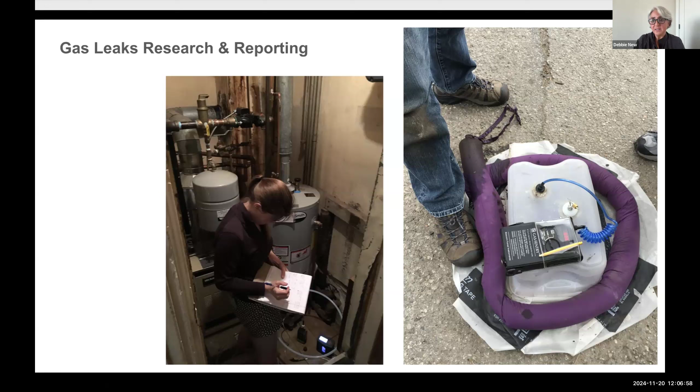Many of us were also concerned about climate impacts from all of this leaking methane. So in addition to focusing on the problem, we tried to find solutions. One of those solutions that we were advocating for was first described as 'pruning the tree,' which I love.

It came from a tree physiologist at Boston University who helped us imagine that the gas system is a lot like a tree underground, going out from a central point and distributing the gas through the trunks, the boughs, and the twigs on the end. And he said, why don't we start at the end, at those twigs, and start replacing the gas system with other solutions.

Gradually pruning it back until we don't have gas in our communities anymore. So instead of having gas in pipes, what we advocated for was water in pipes, to take geothermal and ground source heat pump solutions and network them. It's not an original idea, but to do that where the gas system was really leaky, instead of replacing gas pipes, replacing with networked geothermal pipe systems.

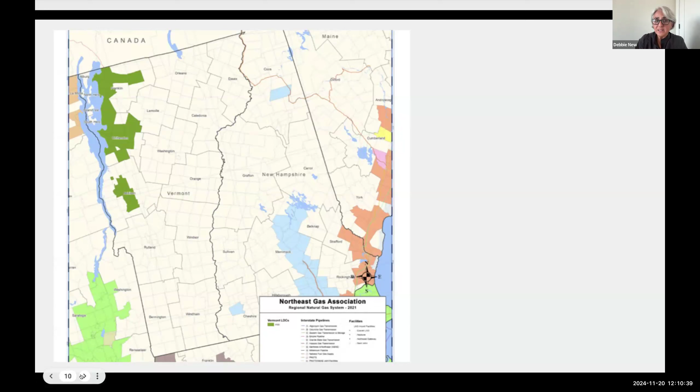Before I go on, I want to make sure the landscape of fossil fuels in Vermont is clear. On this map from the Northeast Gas Association, the gray parts and the green parts are where we have gas in Vermont: 55,000 customers in 3 counties, although it doesn't cover all of even those 3 counties. The rest of the state has a good bit of wood heating, but it's mostly oil and propane. That leads to significant energy burdens because Vermonters are paying high prices to keep their propane and oil tanks full, and who knows what's going to happen with those prices. Many people are choosing either to buy food or medicine or to heat their homes.

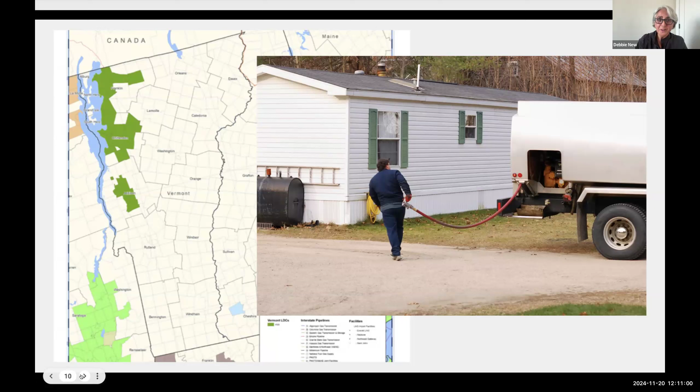Vermont Community Thermal Network started out of this issue, because Vermont was trying to figure out how to get people off of fossil fuels, in particular off of oil and propane, which is unregulated in Vermont. So when I arrived back in Vermont from my work in Massachusetts, people here were debating quite intensely what we could do instead, and it seemed to be a choice between biofuels and people didn't know what. So we needed other solutions. It was clear we hadn't arrived yet at something everybody could agree on that was going to work. We needed something that people could say yes to, essentially.

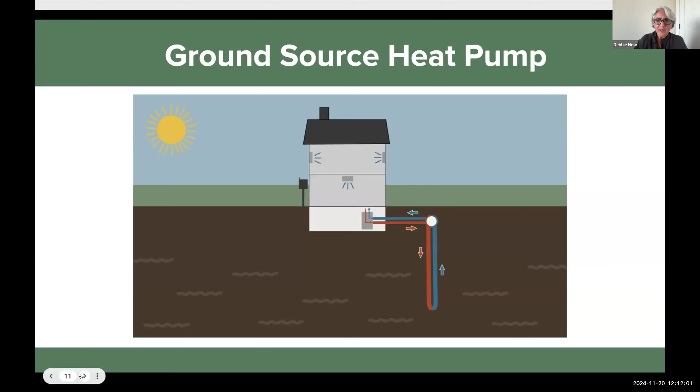So I asked, well, what about geothermal and ground source heat pump systems? And people said, well, we tried that about 20 years ago and it didn't work very well. So I asked, well, what about networked geothermal, knowing about what was going on in Massachusetts and other places with this kind of system? And the response that I mostly got was, what's that?

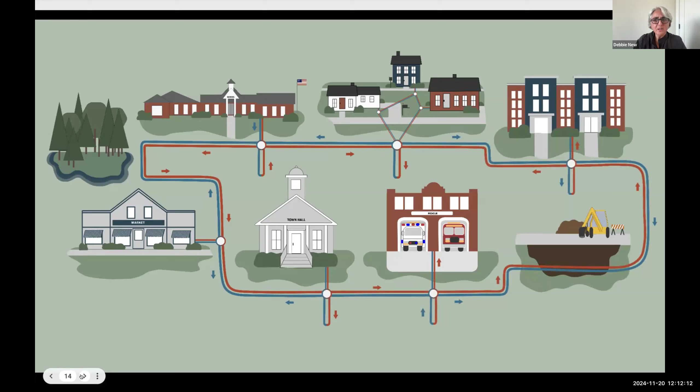So I started working on trying to put this solution on the table. And it wasn't just about networked geothermal, because I learned about thermal energy networks and the value of waste heat. We have a lot of heat that we already are creating and that is just going down the drain or out of our ventilation systems.

One of those big sources is wastewater. Think about the water that you use, that a business would use — a laundromat, a car wash, a hospital, a hotel — much of that water we heat up and then flush down the drain. That's heat that's been produced and paid for. Well, we can harvest that heat. We can access it at the building, at the sewer line, or at the wastewater treatment plant, where there's a lot of heat. That heat can be recaptured and repurposed and shared among buildings.

The other source of waste heat that's really important is waste heat from ventilation systems, and that often comes from refrigeration, because to cool things down, like in your refrigerator, we need to reject heat. That's like how a heat pump works. So imagine a big heat pump, a big refrigeration system like a supermarket or an ice arena or other large buildings where the cooling needs to happen. There's a lot of heat leaving those buildings that we can capture and repurpose as well.

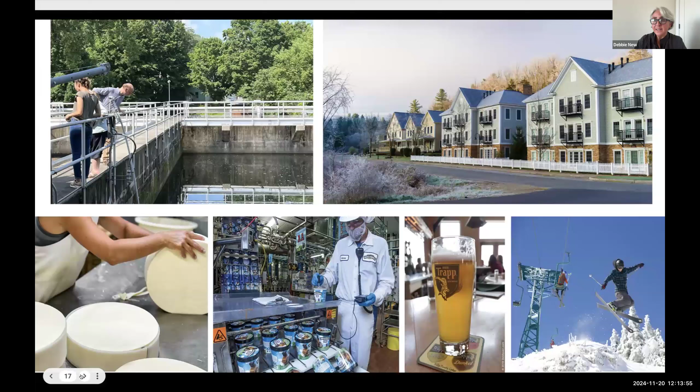And it turns out that waste heat is a thing here in Vermont. Although you might think we don't have big buildings and a lot of waste here, many communities are putting in or needing to expand, upgrade, or fix their water and wastewater systems. You can see people in the upper left-hand corner visiting their local wastewater treatment plant to learn more about that. We also need to create more density in our communities — building new housing, making places more walkable, and revitalizing our downtowns. Those are all really important opportunities for creating a thermal energy network. I could talk more about that.

And it turns out that Vermont businesses are creating a lot of heat that's being wasted — whether it's cheese or a certain kind of ice cream, breweries, or even the ski industry. There's a lot of heat out there that we can reuse.

In particular, the ski industries are really interesting because here we need snowmaking ponds in order to make snow. That's a source of thermal energy right from those bodies of water that we can use. But also the compressors that make snow put off a lot of heat. So it turns out that thermal energy networks make a lot of sense here.

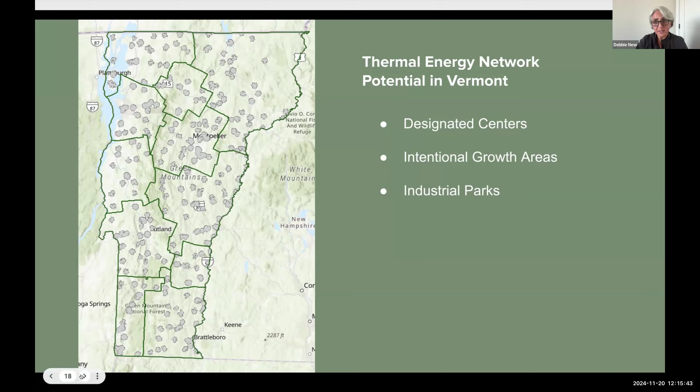So if we can offer clean heating and cooling in these places, we're going to be a lot better off economically. And that's a big factor that is motivating Vermonters to check this out.

So this brings us to Vermont Community Thermal Networks and what we do. We're a statewide organization, and what we do is tap into the expertise we already have here in Vermont and bring in needed expertise from out of state. We're engaging communities about this, and we're also coordinating with Vermont organizations and coalitions and national networks as well.

So the focus of our work here is community-driven thermal energy networks. This work is place-based because putting communities first in this process makes sense when we're already talking about local thermal resources. It's about meeting local goals and needs, as well as staying flexible and introducing thermal energy networks as something we can take multiple pathways to implement here.

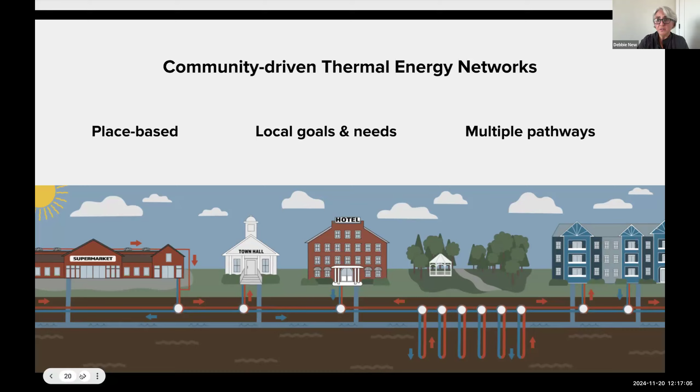In other states, it's mainly investor-owned utilities that you might be hearing about doing these projects, although that's not true across the spectrum, or it's private companies. Here in Vermont, we're not starting with laws that mandate utilities do these kinds of pilots, but we're starting with where heat is in our communities and finding out who's interested. So we're not relying on corporations to do this for us. In our outreach, education, and advocacy, we find that there are a lot of people interested, and we're not doing this by ourselves.

Here are some of our state and regional partners. In Vermont, we have an efficiency utility called Efficiency Vermont, town energy committees, regional planning commissions, and regional economic development corporations, all in on this. We have a bond bank, which is essentially a green bank for municipalities, and an economic development authority, which is essentially a green bank for businesses, as well as other networks and coalitions.

So the other part of our work, besides education and outreach, is about policy, because in Vermont, we needed authority in order to do this locally. Vermont is a Dillon's rule state, which means that whatever is in a town charter is what matters. Well, we didn't find many town charters that say explicitly you can go ahead and implement a thermal energy network and set it up as a local utility.

So we passed a law that just got passed at the end of May this year, and it's pretty simple. It's about 2 pages long, and there can be a link in the chat to a page on our website that tells more about it and has a link to the actual language if you'd like to see it. But essentially, this law allows any municipality in Vermont to implement a thermal energy network and establish it as a utility without Public Utility Commission or state approval and regulation, just like municipal water and sewer utilities operate under local control.

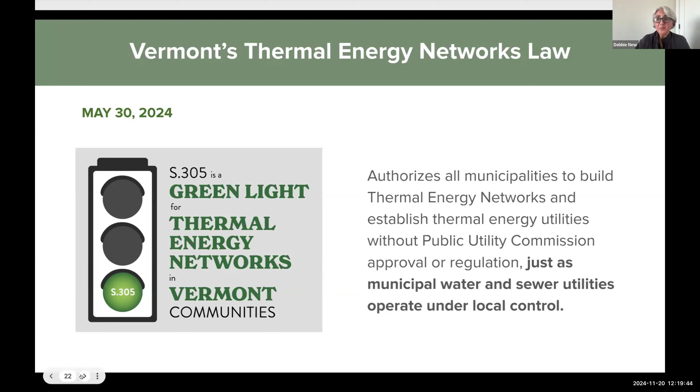So when we advocated for this law, we didn't find any opposition to it at all. In fact, people kind of shrugged and said, well, sure, makes sense. So now we have that green light.

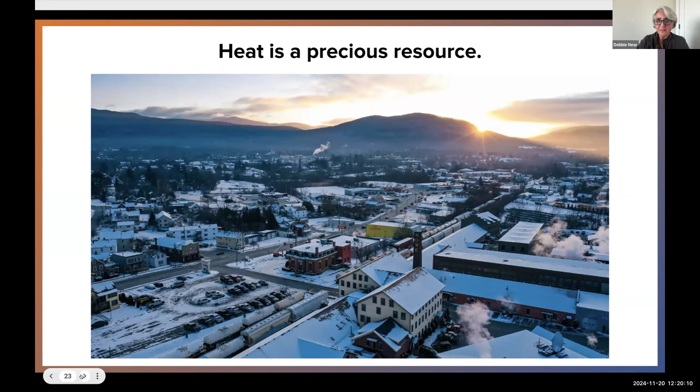So with that education and with the policy in place, I wanted to break it down a little bit for you and show you how we talk about this in Vermont. And where we start is that heat is a precious resource. Now, this is obvious to Vermonters who experience our winters, but it's an important place to start because we spend a lot of time and effort and money trying to make heat and move it to where it's needed and save as much of it as we possibly can.

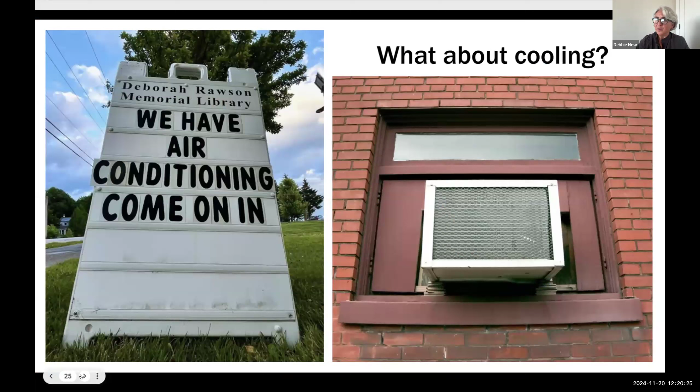And what about cooling? That's something that we're not very well set up for here, but we're going to need it more and more as our climate warms.

So we talk about thermal energy networks as something like this in a Vermont town. You can see here that we have multiple sources of thermal energy. The supermarket is contributing heat from the fans on top into the network from its refrigeration inside. There are multiple buildings where the wastewater is allowing heat to be recovered and put into the network. And you can see under the town green, there's a geothermal bore field, which is an important component of this for stability to supply that moderate constant temperature we can get from underground and provide reliability as well as storage for the system.

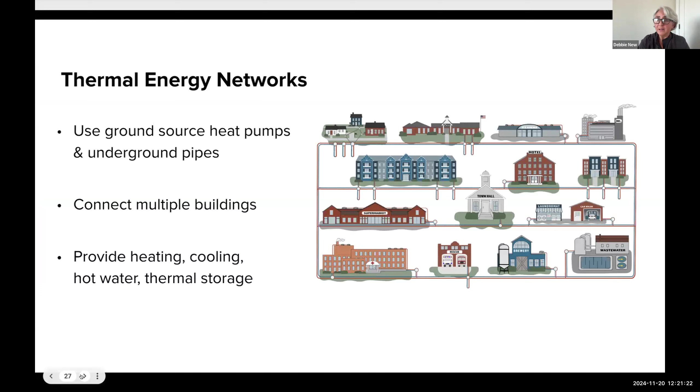So when we talk to people about this, we say thermal energy networks use ground source heat pumps and underground pipes to connect multiple buildings and provide heating, cooling, hot water, and importantly, thermal storage. And we emphasize that thermal energy networks use heat that already exists across a community, in many cases has already been paid for, and would otherwise be discarded, in fact, is most often being wasted. Importantly, we focus on the fact that this kind of heat can be used efficiently.

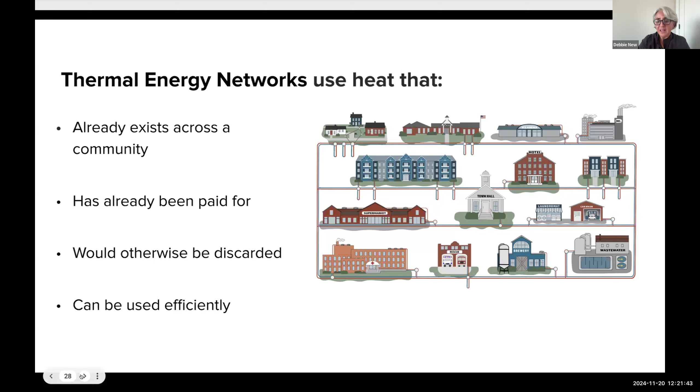And I want to show you how we talk about this. We juxtapose the air source heat pump with a ground source heat pump and how they function. We always say that it's really important to note that air source heat pumps do work and are an important solution to implement, especially in more rural areas where it doesn't make sense to install a network.

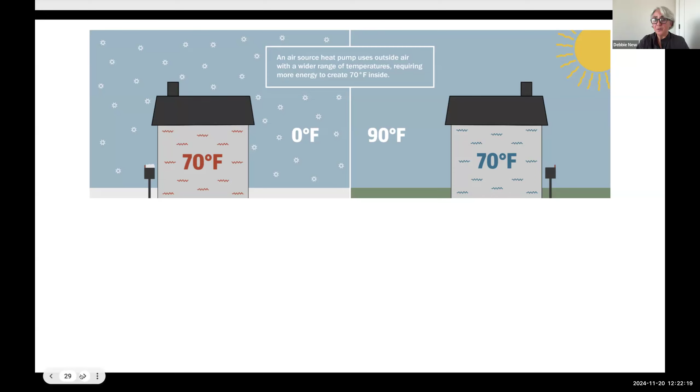So in this illustration, you can see that an air source heat pump has to pull from whatever the outside air temperature is. And at certain times of the year, that means it has to do a lot of work to get from 0 or 90 or so degrees to get to what's comfortable inside. In contrast, a ground or water source heat pump is receiving that moderate temperature from water in pipes.

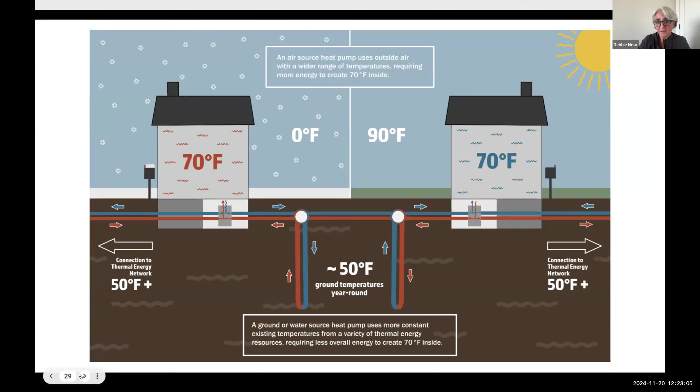That means the system doesn't have to work as hard to reach that 70 degrees we want our homes and buildings to be. In fact, if you add waste heat into the system, those temperatures can be even higher and arrive much closer to what we want inside. That means a ground source heat pump uses much less electricity at those times of year than an air source heat pump.

So we focus on the benefits of thermal energy networks that involve energy savings and associated cost savings. Obviously there are no fossil fuels, which means cost stability and predictable bills. We don't have to rely on global markets, political instability, and supply issues. We already have the thermal energy here. And because the ground source heat pump is so highly efficient, we have lower operational and maintenance costs and longer lasting equipment because there's less wear and tear on it. It doesn't have to work as hard. There's also less electric use overall, meaning less demand on the grid. These systems shave the electric peaks that cost us the most, meaning electric bill savings for customers and for all of us.

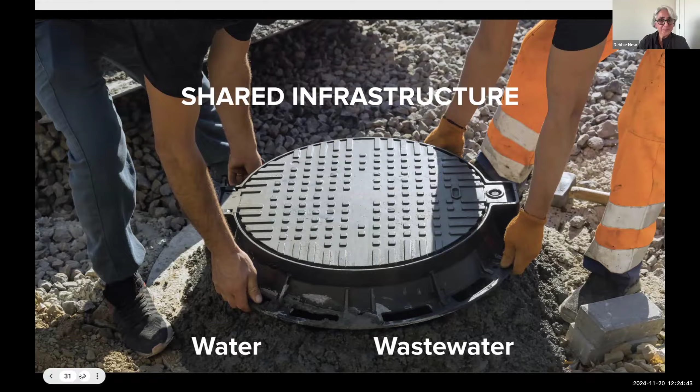This is where we talk about thermal energy networks as shared infrastructure, much like our water and wastewater systems. It's water in pipes, and we already know how to do this. We can lay pipes in our streets, and we have ways to deliver customer service and billing. In fact, water and wastewater systems require treating the water to make it potable or safe to flush into rivers or lakes. So a thermal energy network can actually be simpler than what a local water or wastewater department is used to dealing with.

Considering the energy and cost savings, shared infrastructure like this can yield all kinds of community benefits. This is a short list of what we're hearing is most important to Vermont communities. Economic development and downtown revitalization are often top of the list, because offering clean heating and cooling can be an incentive to retain and attract businesses and workers and create the kind of communities we need. It can also make affordable housing more possible by lowering construction costs, because if a developer can tap into a heating and cooling system offered locally by a municipality, they don't have to bear the costs of putting that infrastructure in themselves. And residents can pay less, because over time those bills will be lower and more predictable than oil and propane.

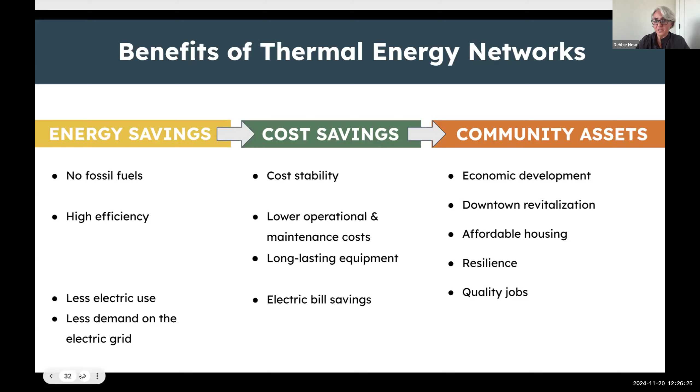These systems also add to resilience, which is a big deal considering the flooding picture I showed you before. Because the components are inside or underground, they're much more resistant to extreme weather and disruption. They also provide quality jobs, because whether people work for a gas system or an oil or propane delivery company, many of them are essentially plumbers and pipe fitters, which are the skills needed to install and maintain these systems. Also, many of our oil and propane companies are local and family-run businesses, so this gives them an opportunity to be part of the energy transition and evolve their businesses.

This is an example we share with people so they can understand what we're talking about and that it's possible. This isn't Vermont, but it's a similar rural community with a population of about 2,700 people. They have a municipal thermal energy network that's been operating since 2012. How they did it was they decided to put a geothermal system in their courthouse. The businesses around that town square wanted that kind of clean heating and cooling too, for lower prices, so they asked if they could be part of it. The engineer said, sure, we could send you a pipe. The municipality decided they could own the system but lease it to an LLC set up to include all the businesses tapping into that community shared system.

There's more to say about this Green Streetscapes project. They also incorporated walkability and safety features in their downtown, and they've definitely seen the economic benefits of implementing this kind of energy system themselves.

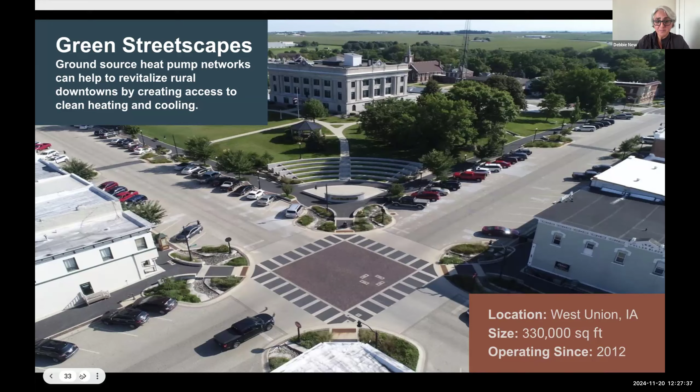So in order to advance this in Vermont, we really follow three main principles. One is to start small, in that we don't have to do everything at once.

The other thing we're working on is to allow local control. Because we're using local thermal sources, it makes sense for the community to be involved in designing a project and also in how it's going to work.

Finally, we want to make sure this contributes to local goals, whether it's about adding housing, updating wastewater or water systems, or addressing climate resilience.

So when we get people together to talk about this, we hold community workshops, and we're basically asking 3 questions: What's already happening here? Where could this work? And who's needed? In order to get to our goal of identifying an approach and a project that's acceptable locally.

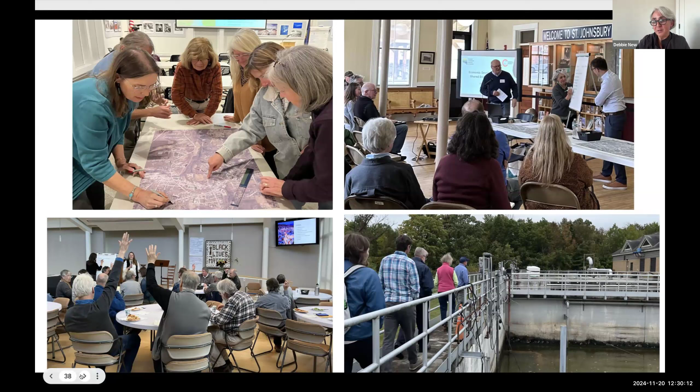This is a small city in northeastern Vermont, and that town has been working hard to revitalize their downtown. They're curious about how a thermal energy network could help. Our local champion there has been the town manager.

This is really important because not only is there leadership there, but also a network of people that we can tap into and identify what is most viable there.

We also try to elicit local knowledge and put it to work. In other words, we found out here that it was not going to work to start talking about climate and emissions reduction. But if we led with economic development and talked about downtown revitalization, people would pay attention. Eventually we could start talking about energy savings and cost savings, but still not talk about climate.

Essentially we learned here to highlight what's in it for you, rather than take a good bit of time to talk about the technology and how it works. We needed to get more quickly to telling people how it could benefit them.

And here we're starting small, putting that principle to work. There's a municipal building that's already in progress to get updated, in fact a complete renovation. To that project, we can add 2 adjacent buildings and then others in that block, and later extend to a school and senior housing, so that we really are starting with just 3 buildings and then involving others as we go.

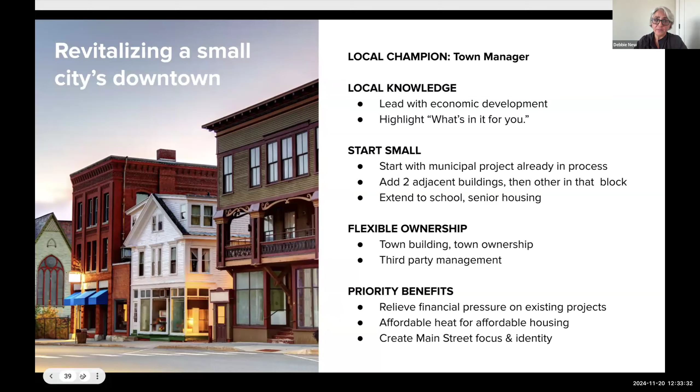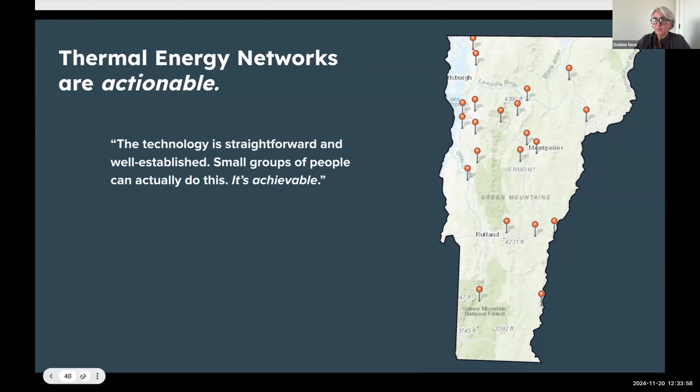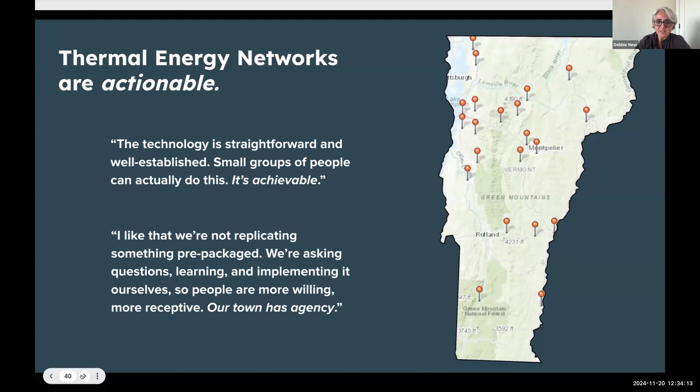And what we're hearing from people is, as one person said, the technology is straightforward and well established. Small groups of people can actually do this. It's achievable. And another person, unsolicited, said, I like that we're not replicating something prepackaged. We're asking questions, learning, and implementing ourselves, so people are more willing, more receptive. Our town has agency.

Communities needed to know where to start, what a project might look like, and what they needed to do to make it happen. Well, it turned out the process of creating this was mostly helpful to us to learn how to do this in person and in place with people. So we learned a lot putting it together, and it turns out it's been helpful to some communities outside of Vermont. So I wanted to talk through the components of this briefly with you.

So let's start with start here. The toolkit has one page for each of these sections, which we've tried to make as streamlined and user-friendly as possible. So you can see here in the orange block, there's a main resource called Where and When a TEN Makes Sense, which is about where to look for thermal energy networks locally. You can see there's some actions to take, a worksheet, and some supporting materials, essentially several of our fact sheets.

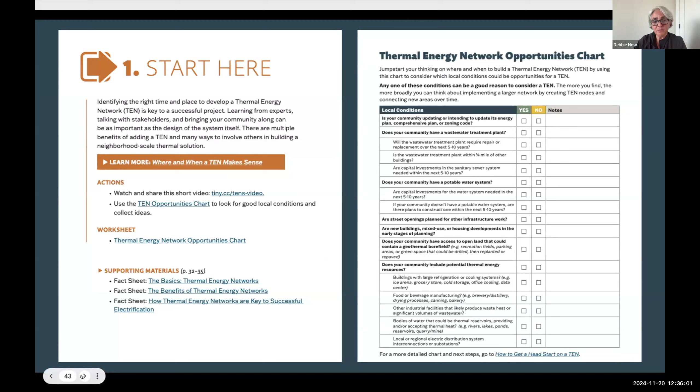So this is the chart that goes with start here. And you can see there's simple questions that you can tick off yes or no, and you can get an idea of how many local conditions you have in your town that could lend themselves well to a thermal energy network. And even having one of these could be a good reason to advance a thermal energy network exploration.

The second section, identify opportunities, is essentially about site selection. And we ask people to look for buildings that are going to be producing heat that could be repurposed. So this is also where we talk about waste heat from refrigeration and wastewater, so people can learn about what to look for and what buildings to match with buildings where there's already heat being produced.

And this doesn't mean that people have to jump into a thermal energy network project. There's lots of things people can do in order to be what we call TEN ready. So they can inventory their thermal energy resources and inventory potential buildings to connect to the network, and then create a simple map.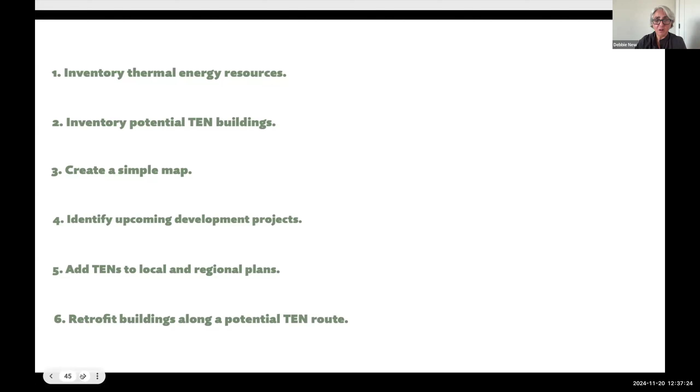They can also identify upcoming development projects, whether those are private developments or municipal projects in the works, and also adding thermal energy networks language to local and regional plans, whether they're town plans or energy plans. It's important to have that idea in there to make it easier to do a project when the time comes. And of course, retrofitting buildings along a potential route or in a potential cluster of buildings for thermal energy networks—in other words, weatherizing and insulating buildings and upgrading electrical systems—is all work that can be done anytime.

And we provide information to go with each of those so people can have more resources. The third section, on understanding ownership, is not just about ownership, but it's also about which ownership choice means what for financing opportunities.

So we focus on three models: a cooperative, a municipal model, and a third-party ownership model. For each of those, we talk about the advantages and challenges, and we suggest questions for people to consider to help figure out which one makes sense where they are. And then from there, to understand what that means for financing in terms of the IRA incentives we have right now, and also who they might need to enlist to get help figuring this out.

Finally, develop your project is essentially what to expect when you're expecting a thermal energy network. It talks about the different phases of a project and what people can expect as the pipes go into the ground and the heat pumps go into the building.

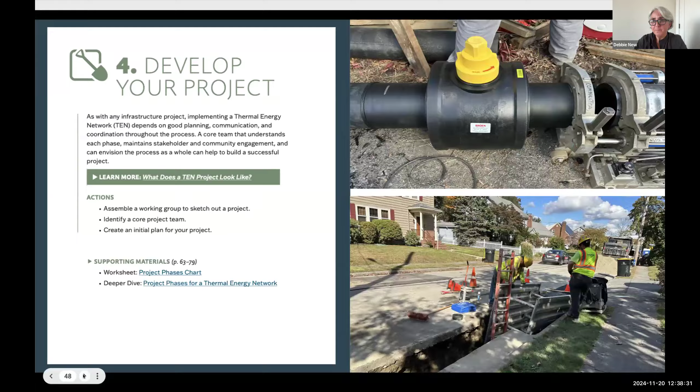So I like to end where I began, essentially, which is the obvious statement that heat is a precious resource, and that we have the heat we need, as well as opportunities to harness it. So I wanted to conclude today by sharing a little bit of perspective on what we're saying now about thermal energy networks and their importance.

First of all, I want to add a personal note that I'm getting to know Vermont in a whole new way through this approach, in a way I otherwise wouldn't, and I'm really enjoying that part of the work. It's really fulfilling and meaningful to engage people in this solution and empower them, equip them to do this work themselves with support from the experts we engage as well.

Also, at this time, I'm feeling even more that local power and public power is important, and that no matter what changes at the federal level, it doesn't diminish the importance of the municipal or local role in creating infrastructure that supports economic development and other goals that people have in our towns, in our communities. Essentially, a thermal energy network is a relocalization of energy and power.

Also, thermal energy networks are really a conservative move because they're about using what we have, not about consuming more. And municipal energy is also conservative. Most public power in the US is actually in red and rural states like Tennessee, Nebraska, Ohio, Wyoming. So it's not a new idea. We're familiar with how to do this, and it's something we can do for ourselves.

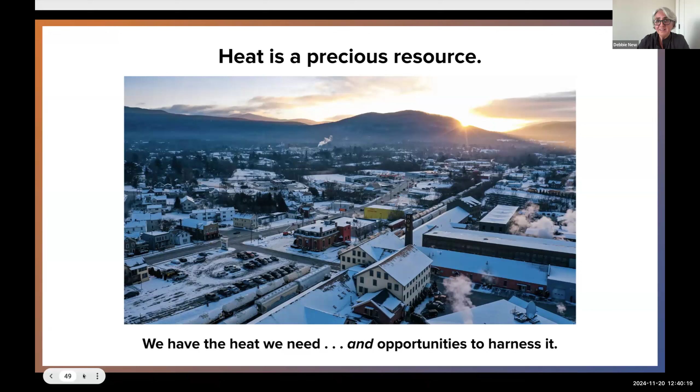So I really look forward to hearing what your questions are and also learning from what you're experiencing where you are, what you think is possible.